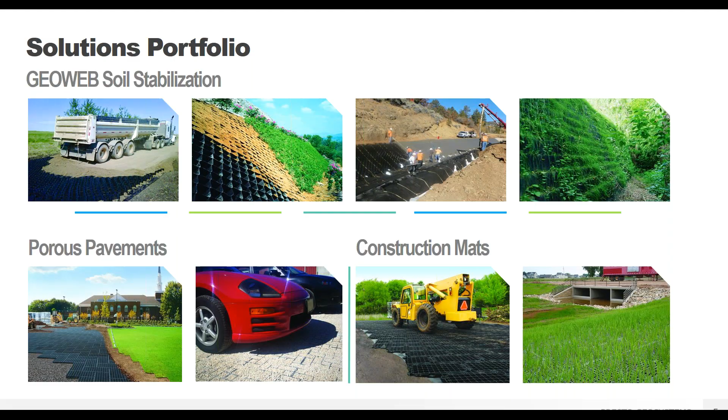So let's begin with discussing how Geoweb 3D confinement can provide benefits for unpaved and paved surfaces. The Geoweb system consists of 2 main attributes. The first is the cell size. The cells come in 3 different diameters: 8.5, 10.5, and 18 inches. The cell wall heights include 3, 4, 6, 8, and 12 inches. The actual cell size and height will depend on your site-specific project details and site conditions.

Presto will provide a free evaluation, including calculations, cross-sections, and specifications for free, and this is no matter how big the project is.

The ultrasonically welded seam, where all the connecting points are located, is very important to the function of a geocell. The stronger the seam strength, the better performance of the geocell, period. And a strong seam allows for better lifetime performance.

Geoweb is produced using high-quality, virgin, high-density polyethylene resin for consistently strong welds at the seams, while also maintaining semi-rigid ductile properties, high stress crack resistance, overall toughness, and long-term durability. Geoweb geocells do not use fillers or exotic polymer alloy blends, which can ultimately reduce weld strength. There are often some competing products in the name of increasing cell wall stiffness.

To avoid weld failures and the damaging effects of differential settlement, uniformity and performance across all elements of a geocell system is much more important than stiffness alone.

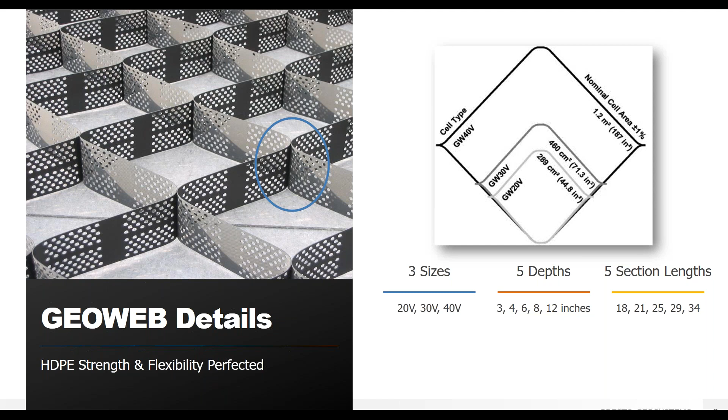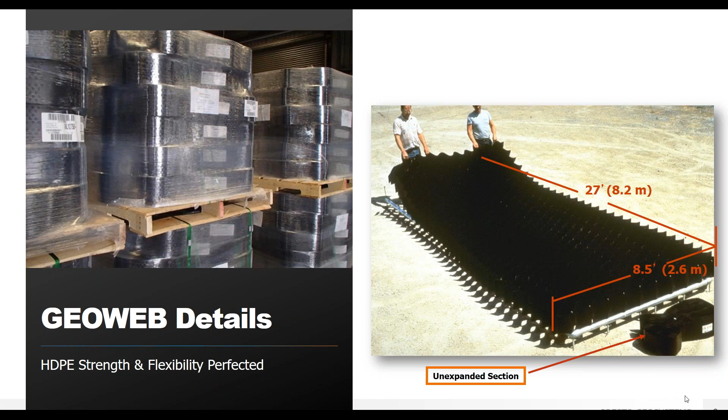Here you can see a typical Geoweb panel. It comes tri-folded on a pallet. Each panel here you can see is about 27 feet in length, and we do have different lengths depending on what size you need for your project. Panels are very flexible, you can see they expand very easily for installation.

In order for a geocell system to perform uniformly, it is critical that both the factory welded junctions, those are the internal junctions, and field joint junctions that connect the individual panels, the mechanical junctions, perform at a level that is the same with that of cell walls. Therefore, an incremental improvement in one characteristic, for example cell wall stiffness, is only valuable if a complementary improvement has been made in the other components of the system.

Like I said, Geoweb manufactures a proprietary blend of high-quality virgin HDPE. Our proprietary formula has stood the test of time for more than 40 years and contains no fillers, unstable polymer combinations, or exotic polymer alloys. For most typical sites, Geoweb retains durability for greater than 50 years, with lab tests indicating 140 years without degradation, even at full exposure to the elements. We stand behind our numbers so you can deliver certainty in the solution you build with materials you can trust.

The system components are all the supporting pieces that help the Geoweb protect the surface and sub-base layers. It also ensures relatively uniform performance of the interconnected system, thereby protecting against the damaging effects of non-uniform deformation and differential settlement in response to applied loads.

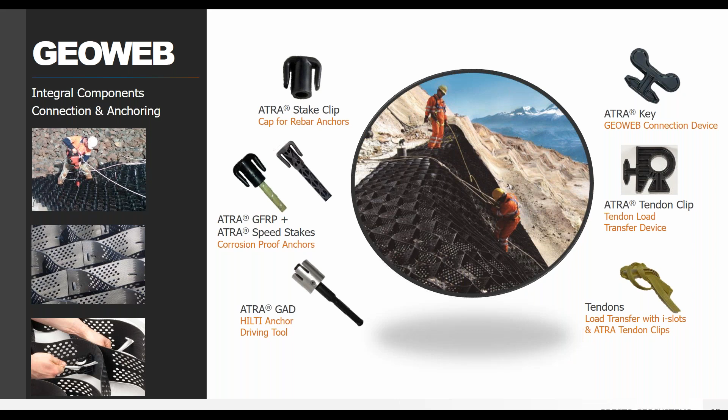First, the Geoweb is equipped with numerous design and construction components that increase the strength and speed of installation. For load support applications, the ATRA Key is a major component for a completely integrated system. ATRA Keys connect Geoweb panels into a single system. The keys speed installation are made out of plastic and will last the lifetime of the project.

ATRA Keys ensure that the panels will not separate, and that the Geoweb system will not fail under anticipated loads. The specific engineering values of the ATRA Key will ensure the system holds up to loading over time without the corrosion seen in staples or the failure underperforming zip tie systems.

Here you can see the slide how the ATRA Key goes through an i-slot in the cell wall, connecting the adjacent panels.

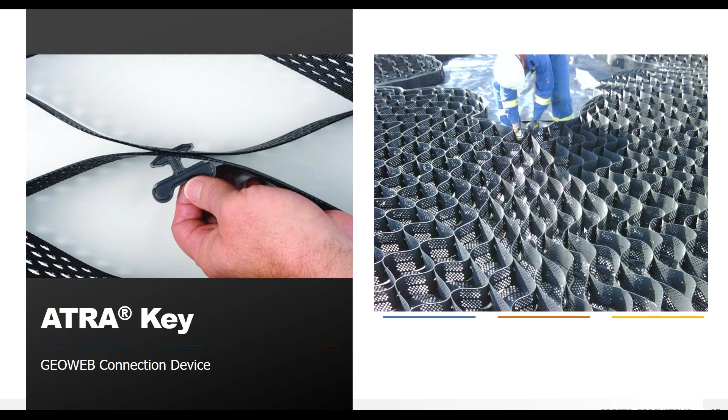The purpose of cellular confinement is very simple. It's to stabilize the movement of unstable soils, both horizontally and vertically. It is an engineered system integrating multiple geosynthetics with the best method of confinement and subgrade stress reduction.

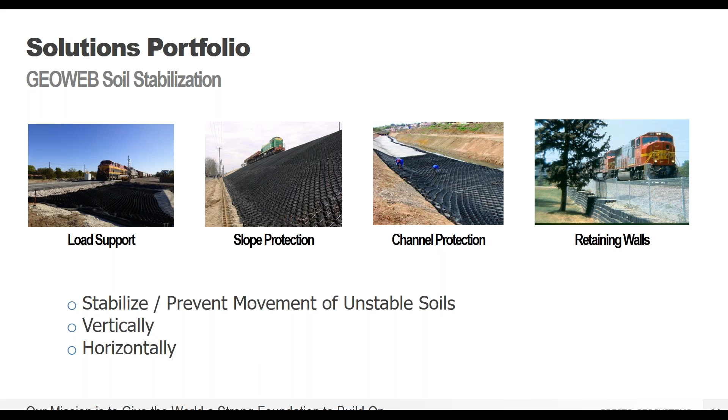Do we need more reinforcement? Do we need to go with an enhanced woven that has strength pounds per foot? Do we have a lot of fines where the fines could get into the non-woven geotextile and clog it? So all those factors come into play when we're designing a system.

Based on the design that we'll give for free, sometimes you may need a subbase under the Geoweb, especially if you've got poor CBRs.

Then the Geoweb system is placed with the desired infill material. Like I said, that could vary. We can use sand, coarse sand, crushed aggregate, recycled materials. It will have a surface course, and that supports the given load.

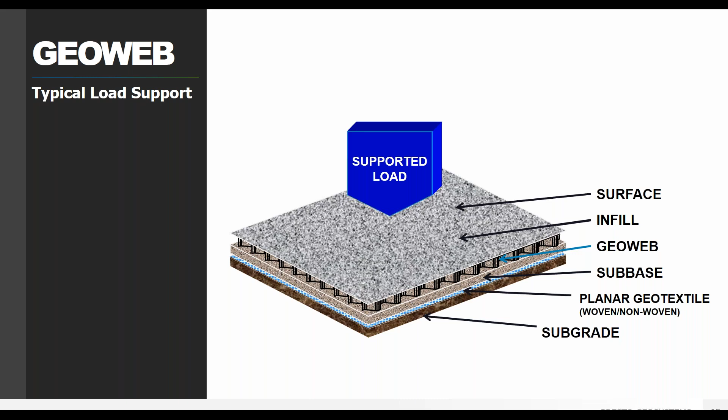So GEOWEB 3D confinement works this way. When a vertical load is applied, the active earth pressure in the loaded cell pushes back against the passive earth pressure in the adjacent cell to form a stable system. So each cell helps support the ones around it.

The GEOWEB cell walls also transfer hoop stress, which is important in keeping the system intact and creates what is known as the mattress effect. The strength of the seams around each cell, the material stiffness of the individual strips, and the connection method between panels are all important factors in determining how the GEOWEB system can improve site condition. Strong seams, semi-ductile resin properties, and integrated connections are critical to the performance of the system.

In a load support scenario, as we know, vertical deformation can only occur with compaction or through lateral movement. By spreading out the load in the classic approach, one can reduce compaction on your surface cells, but only with cellular confinement can you ensure that no lateral shifting and rutting occurs.

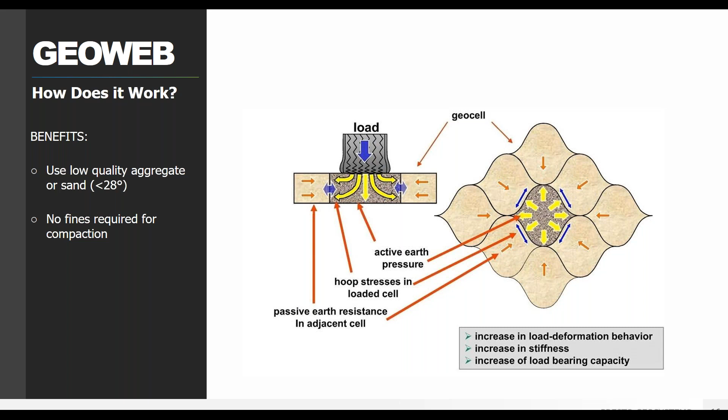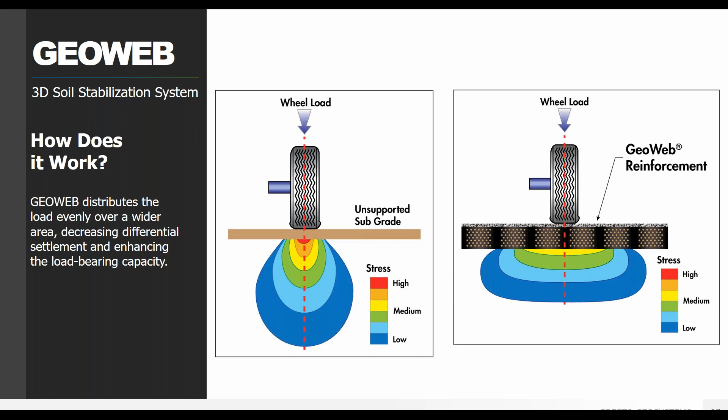Here you can see the stresses on the subgrade with the unsupported subgrade on the left and the GEOWEB reinforcement on the right. Notice how there's a complete elimination of the highest stresses at the surface with the GEOWEB reinforcement. The stresses are reduced and distributed over a wider area, which once again we call the mattress effect. This effect reduces stress reaching the subgrade and leads to a significant decrease in deflection and rutting.

The second main attribute of the GEOWEB system is the infill. The important benefit of the GEOWEB system is that even a low quality aggregate, recycled materials such as crushed concrete, and even sand can be used to infill the cells. Using recycled materials, low quality aggregates or sand you can imagine can save a significant amount of money, not only on the material, but also in the hauling costs.

We can also eliminate fines when desired, since the cell walls provide the confinement and aid compaction and cohesion of the soils. So without fines, you can significantly improve drainage and let the water flow freely through the system, preventing pore pressure buildup and ultimately global failure.

The ability to use sands and low-quality aggregates really sets GEOWEB apart from other geosynthetics, which need a high-quality aggregate. Those products require high-quality crushed aggregates, high friction angles to achieve performance. With the GEOWEB system, low friction angle materials are just fine. The GEOWEB panels achieve their full potential even with these poor materials, which can be a huge savings.

Another good thing about the geocell is once you have this infilled, you can actually start using it as a haul road. It doesn't have to be compacted. Once it's filled, you can start using it as a haul road.

So we now describe how geocell works at the surface to create a stabilized, unpaved road. The aggregate surface has advantage in saving pavement costs. And with geocell filled open-graded course, you can provide some stormwater infiltration and storage. I'll also show you a project for reducing stormwater volumes.

This project was rushed because the railroad purchased a 100-ton reach stacker without understanding if the subgrade would support the intended loadings, and the facility was scheduled to start operation within a few days. The loader made only a few initial passes before the weak subgrade started to fail. Deep rutting caused concern, not only for the integrity of the surface, but also for safety.

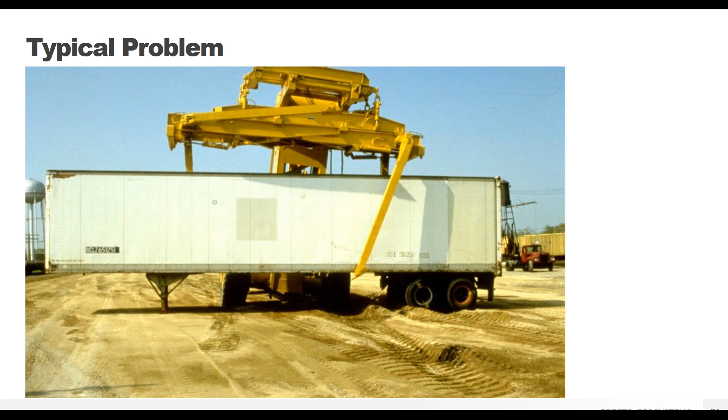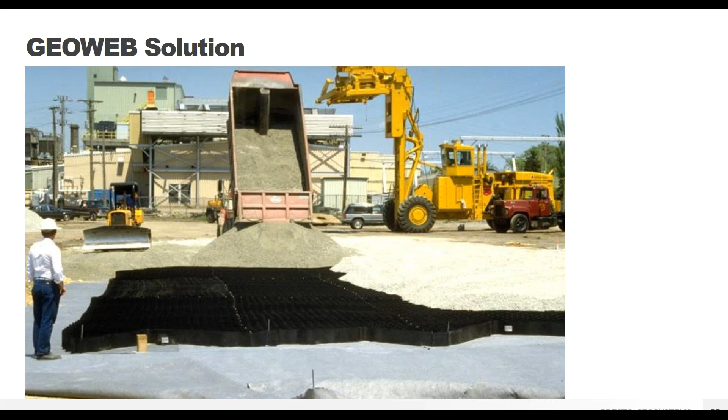We worked with the client. This was actually really close to our shop, done probably about 20 miles from our plant in Wisconsin. Here we use 8-inch geocell panels on top of a 12-ounce non-woven geotextile. This was put in 25 years ago, and it's still in operation today.

This is the intermodal project for CSX Railroad in South Carolina. As you can see in the picture, the 60-ton reach stacker was severely rutting the existing aggregate yard. The rutting led to slowing down of loading and unloading containers, along with routine maintenance required to keep the yard in operation.

The subgrade wasn't that bad. It was around a 2% CBR, but there were so many fines in it that that's what was leading to the rutting. Here you can see a close-up of the rutting that was occurring.

We worked closely with the engineer and CSX to come up with a system to support the load and eliminate rutting. We worked closely with the geotech and the owner on this site, and through the review of the report, it was determined that we could use the on-site fill for the geocell panels, which significantly reduced the cost of importing fill.

Here the solution consisted of, once again, 6-inch geocell panels, enhanced woven geotextile, and a 4-inch wear surface.

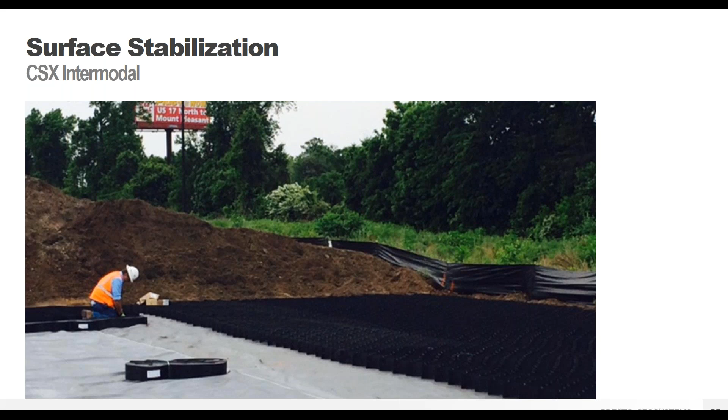Here you can see the geocell panels being filled with the on-site soils. The contractor basically just stripped off the material down to the desired elevation of the subgrade. You can see on the side, they stockpiled it and then transferred material back into the geocell panels as the infill, so once again, limited need to import costly fill.

But one of the biggest savings is that the downtime of the yard was significantly reduced, which was especially important due to the high volume of tractor trailers that the facility handles on a daily basis.

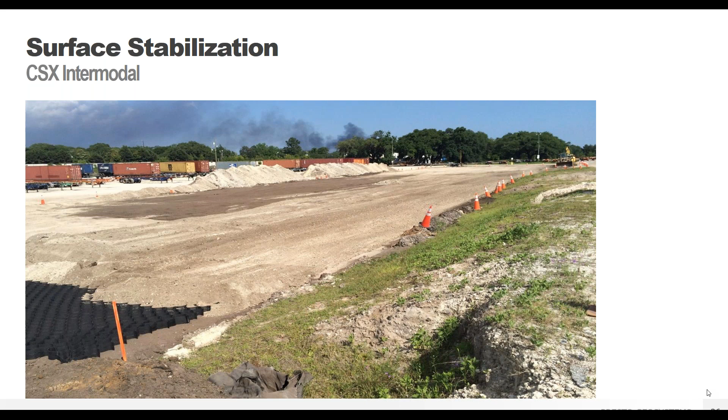And here you can see the final solution. We filled this one up with sand, the existing site soils, and then we came in with 3 to 4 inches of crushed aggregate, just as the wearing surface.

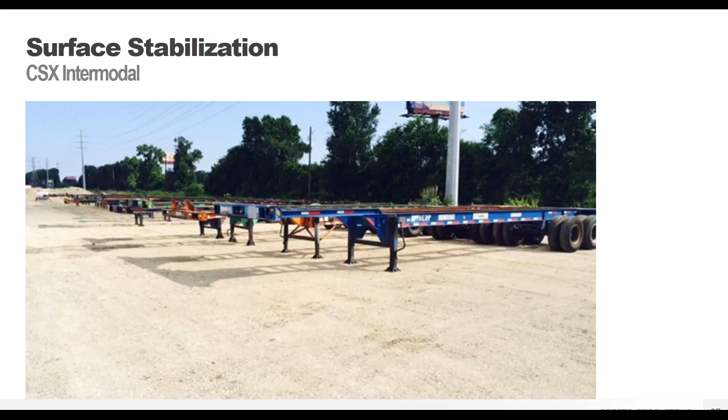This project was started out in Mexico. The original design called for a reinforced concrete surface, but all the bids came in well over budget. So the client looked at different solutions and some value engineered opportunities. Once again, this wasn't that bad, it was a 3% CBR.

Once we worked closely with the engineer, we came up with a system to support the 80-ton reach stackers. This one, once again, the design consisted of an enhanced woven geotextile, 6-inch Geoweb panels, and a 4-inch wear surface. They used a really low quality crushed aggregate sandy fill that they had around the site.

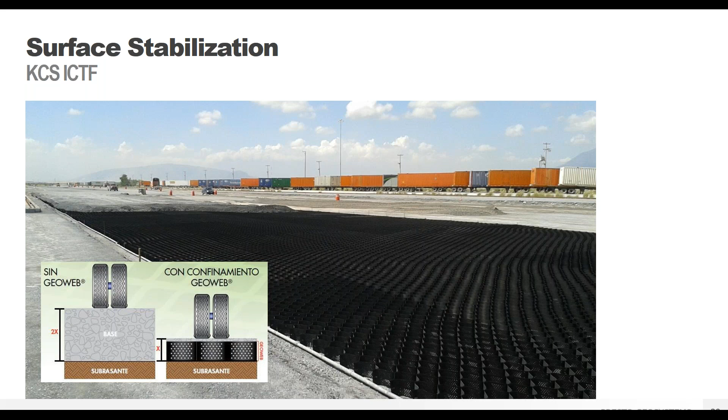Here you can see the panels being infilled with the infill material. The fines content was limited to about 15% to allow stormwater storage and infiltration.

This photo is also good at illustrating how infilling can be accomplished. The trucks just dump the aggregate into large piles. Then either with a front end loader, a dozer, or any similar equipment, the aggregate can be pushed into the empty cells while the equipment drives on the filled areas. So it's a very fast and efficient process. It doesn't take any additional training or expertise on behalf of contractors.

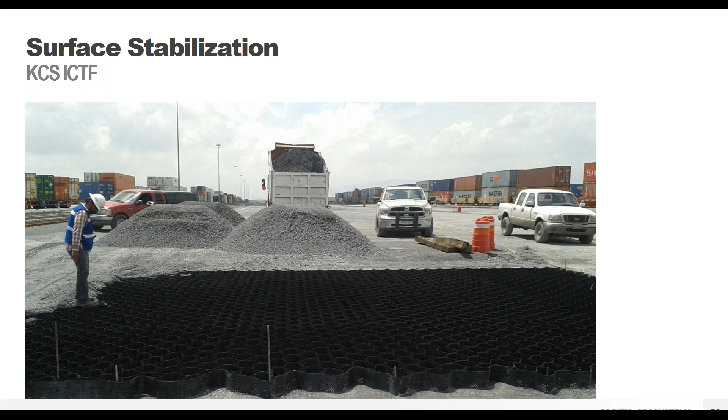You can see the final wear surface being applied over a solid surface. After placement on this one, they actually had a small asphalt tack coat as a surface just to control dust and provide a little extra strength.

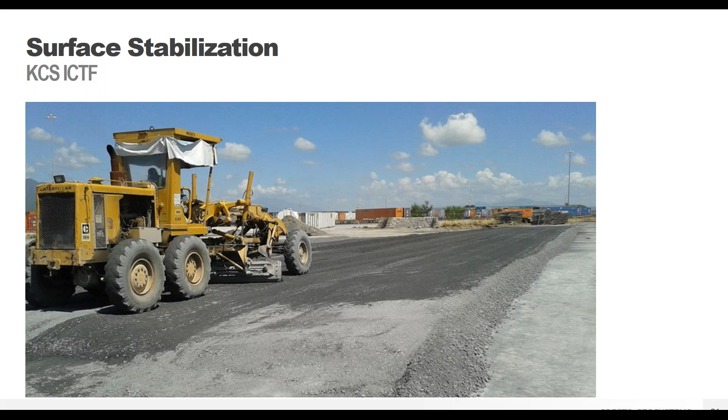This was an interesting project as the Geoweb solved two issues. This was a 2-acre site in Pennsylvania where the owner wanted to increase the size of the facility, but there was not enough room to provide a paved surface due to lack of area to increase the stormwater ponds.

The first issue was to provide a durable driving surface over a poor subgrade for parking and storage areas along with the area of expansion. The existing surface on this one would require maintenance on a routine basis due to the poor subgrade and heavy loadings. The area had to support AASHTO H20 loadings, along with the heavy loadings from the wheel gantry cranes.

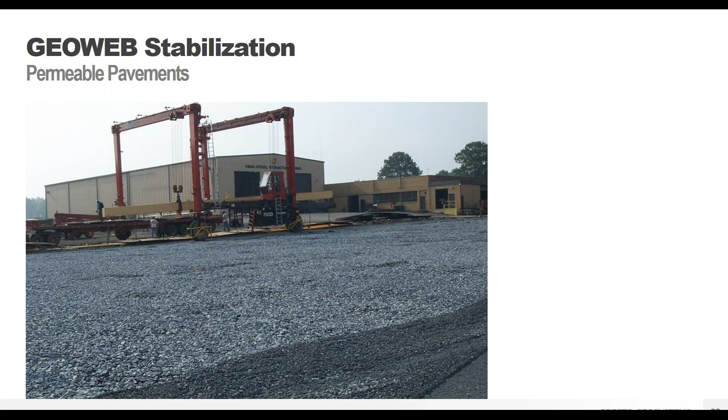So through the design process, we came up with a solution for him. We actually had a geotextile go down, a heavyweight non-woven geotextile. This one we had a 4-inch base, 6-inch Geoweb, and then a 3-inch wear surface applied.

The second issue was to provide on-site stormwater storage to allow the facility to reduce the volume of water reaching the stormwater pond. As I mentioned, since you don't need fines to achieve compaction with the Geoweb, the system will act as an on-site detention basin, storing water in the void spaces of the fill.

As a general rule of thumb, a 3/4 crushed aggregate has a void space of approximately 35%. So you can imagine how much water you can store potentially to reduce stormwater runoff and ultimately reduce the stormwater pond volume. Since the local stormwater municipality let us store water inside the Geoweb system, it allowed for the expansion of this facility, and the existing stormwater pond did not have to be increased.

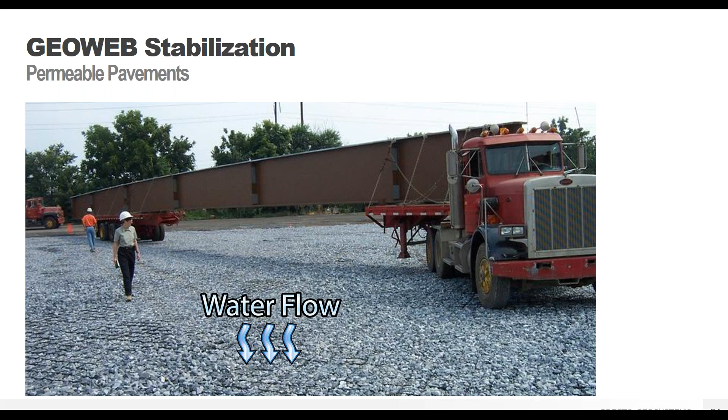You can see a close picture of the open grade material that was used. No fines, good for lockup.

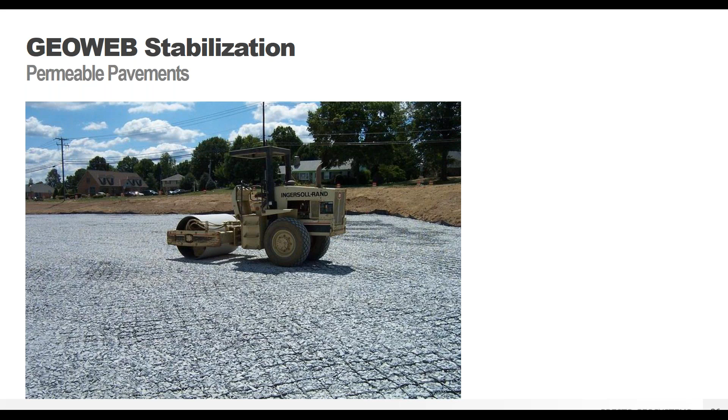One point on GEOWEB compaction: there's no need to really hammer the infill with vibration to achieve compaction. Typically, vibration is kept low, and the weight of the compactor is more than adequate to provide proper compaction. If you try to really vibrate the material, you can actually lift the GEOWEB panel. So just be aware that you should just lightly vibrate or typically just roll it.

We do port and intermodal works all over the world. This is a GEOWEB surface stabilization system for phase 3 at the port of Invergordon in the UK. The project was for 6 acres.

It consisted of 2 separate areas. One area was 3.5 acres and used 4-inch deep GEOWEB panels, and the second area was 2.5 acres and used 6-inch deep GEOWEB panels. The 2 areas were subject to different loading conditions, and during the design phase, we worked with a consultant to determine the most appropriate panel depth to meet site conditions and still provide a cost-effective solution. The 4-inch deep GEOWEB panels were used in the vehicle parking and storage areas, and the 6-inch was used where the gantry cranes were.

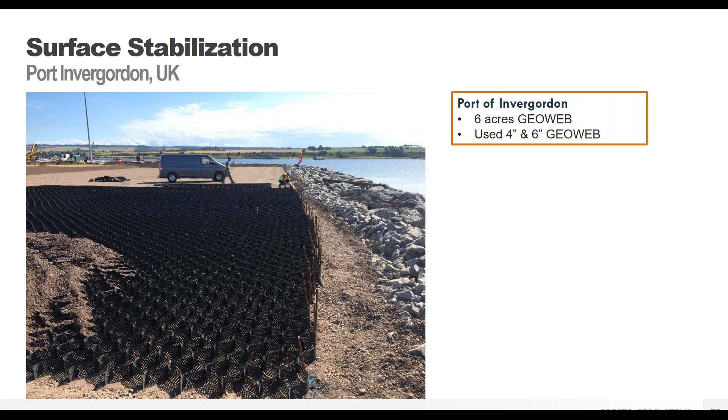The area was constructed using unbound pavement with a crushed gravel surface. The GEOWEB presented the perfect solution to minimize the overall cross-section depth through its load transfer mechanism while controlling differential settlement in the heavy loaded gantry crane area.

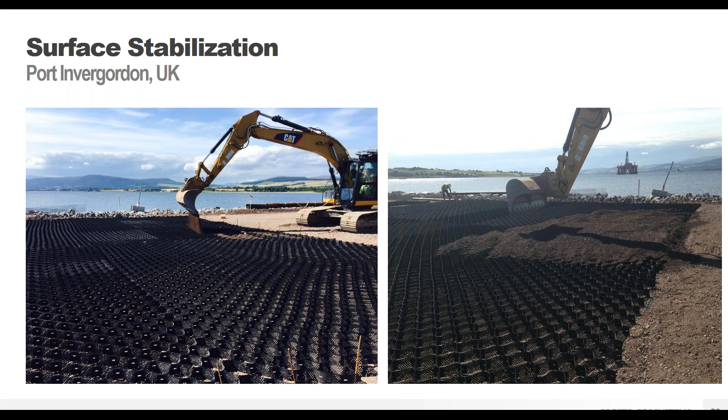Differential settlement was a significant concern on this project due to the variable subgrade strengths. So the engineer developed a cross-section that would bridge low subgrade CBR areas, using an enhanced 70 kilonewton per meter woven geotextile along with the GEOWEB. One of the most cost-effective methods to reduce long-term consolidation from settlement due to cyclical loadings on a soft subgrade is to increase the stiffness of the overlying area.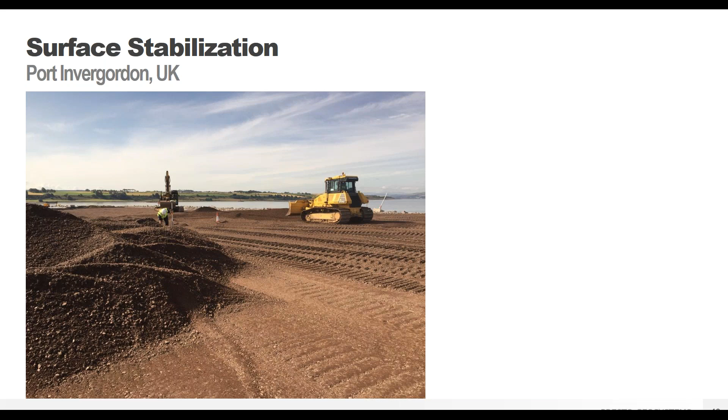Under cyclical loadings for all these projects, Geoweb prevents the lateral movement of the infill material and dramatically increases the shear resistance. In effect, Geoweb is more like a three-dimensional structure or semi-rigid slab. The high shear strength and greater load distribution reduces the vertical stresses reaching the subgrade, resulting in a more durable subgrade that increases pavement life, preventing long-term settlement and consolidation.

Here they're just lightly compacting it, no vibration. Here you can see the final surface after compaction. This project was about almost 6 acres and a 2% CBR.

It doesn't matter how small the project is in size, we always provide the same amount of technical support in our evaluations, including cross sections, calculations, specifications, and a written summary.

Here's a project for gantry craneways being used to unload trailers from rail cars. You can see there's a significant amount of rutting due to the crane, and the interesting methods used to stop it. They tried metal panels and even timber mats with no luck.

We do a lot of work with this Class 1 railroad. The Class 1 that operates this track told the owner to give us a call since it was taking so long to offload the rail cars.

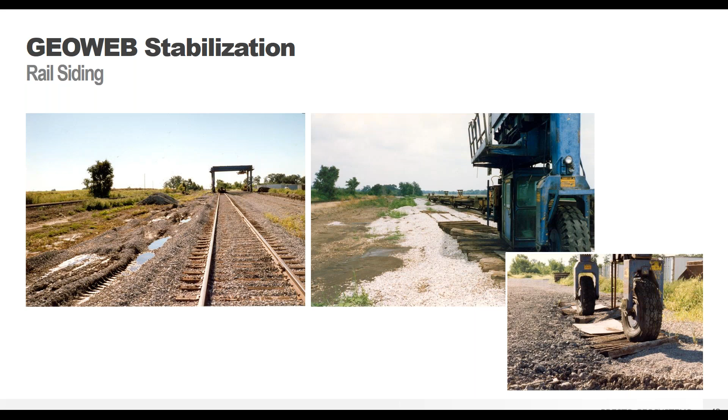Like I mentioned, it was not a large project. They only used 15 panels of Geoweb on each side of the track, but we still provided a full evaluation, so the owner and engineer completely understood our solution and its benefits. The solution consisted of a heavyweight non-woven geotextile, 8-inch Geoweb, and a 4-inch wear surface.

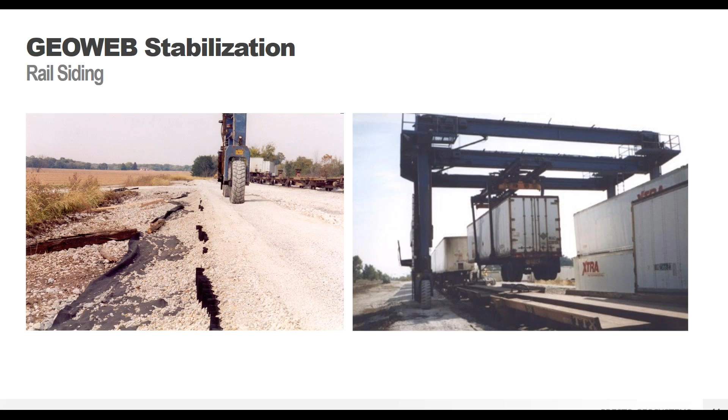As mentioned, we provide free evaluation of all projects, no matter the size. The evaluation will include the written summary, cross sections, calculations, and specifications. Typical turnaround time is 1 to 2 days, and we'll provide full details of the calcs used to prepare the evaluation, so you have a complete understanding of how we did the calculations for all of our projects.

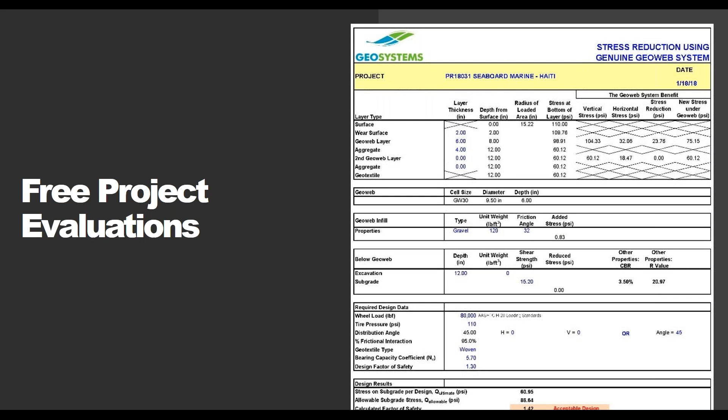Typical turnaround, 1 to 2 days. If we have questions, we'll give you a call and work those out.

So now we discussed how Geoweb is beneficial in our hard pavements, including asphalt, reinforced concrete, and roller compacted concrete, and especially in areas with soft subgrades and drainage issues.

We can all relate to this slide and recognize the problem. An unstable base under hard pavements over time will lead to rutting, settlement, potholes, degradation, and eventually complete failure. Common factors include differential, localized settlement, soft subgrades, and poor drainage. Reducing the damaging effects of differential settlement and protecting against buildup of excess pore pressures are key factors in extending pavement life and reducing long-term maintenance costs.

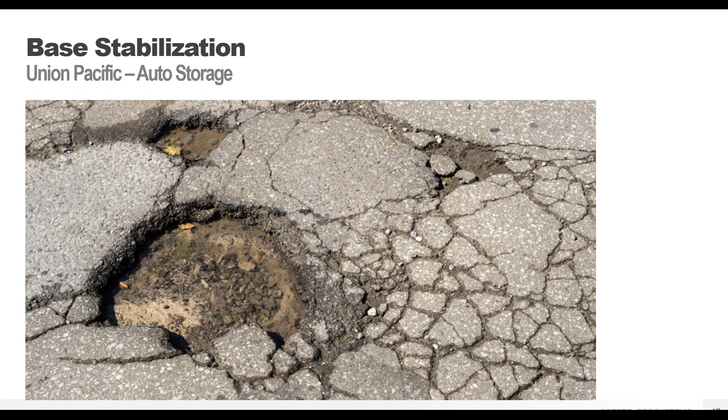This project was for Union Pacific Railroad in Benicia. It is an auto storage yard for cars being offloaded from Korea. The original design included geogrids with a high-quality aggregate. When construction started, the subgrade was too wet and too soft for geogrids to be a cost-effective solution, so the engineer contacted us to provide a value engineered solution using Geoweb.

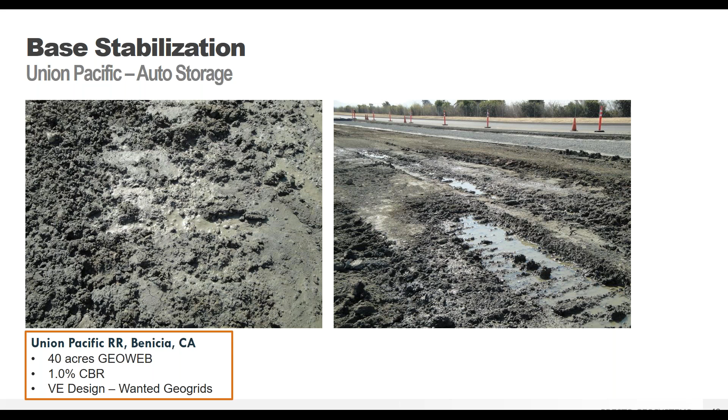For GEO, this area has some very low subgrade strength. CBR is 1% or less. You can see the pictures how mucky it is. So we worked closely with the engineer and the railroad to provide a Geoweb solution.

It consisted of a high strength woven geotextile, 6-inch base layer, 6-inch Geoweb panels, and then a 2-inch wear surface over the top. Ultimately it was paved with asphalt.

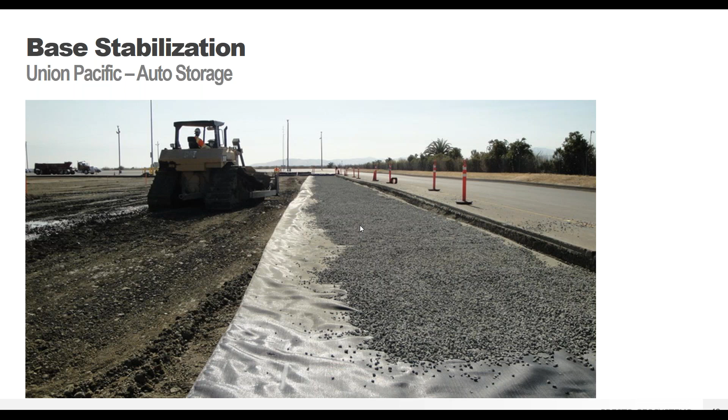They put this base layer underneath the Geoweb to function for 2 different purposes. One was some extra stability and extra strength, but also we kept this layer low fines and allowed the water to flow freely under the pavement so it didn't build up the pore pressure.

You can see the expanded Geoweb panels and open grade infill being placed into the panels. Here they just dumped them and used dozers and front end loaders with the GPS system to get the proper elevation. Just a closer view of the infill procedure.

Once again, aggregate is just dumped and pushed into the cells, most commonly now just with the GPS system on top of the dozer. Once the cells are filled, you can immediately drive on it without compaction. Very quick to install. You can see the Geoweb panels are always far out ahead of the infilling.

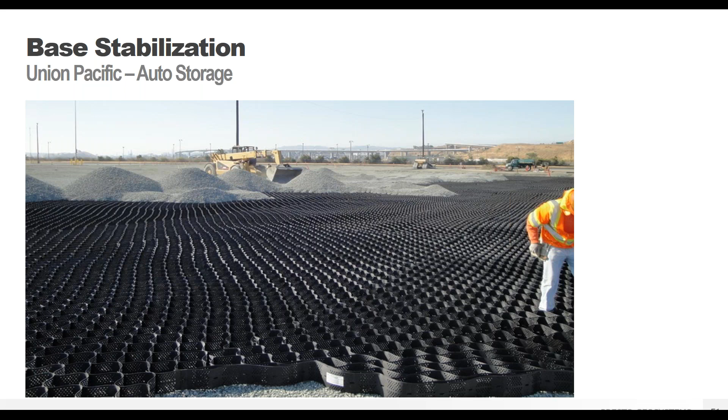You can see the placement of the asphalt on top of the GEOWEB panels and the wear surface. A regular asphalt paver was used, and it's compacted with a smooth barrel roller. No special equipment or procedures are required when paving over the GEOWEB panels, so the paving crew can install it at regular speed without needing extra training or additional equipment of any kind.

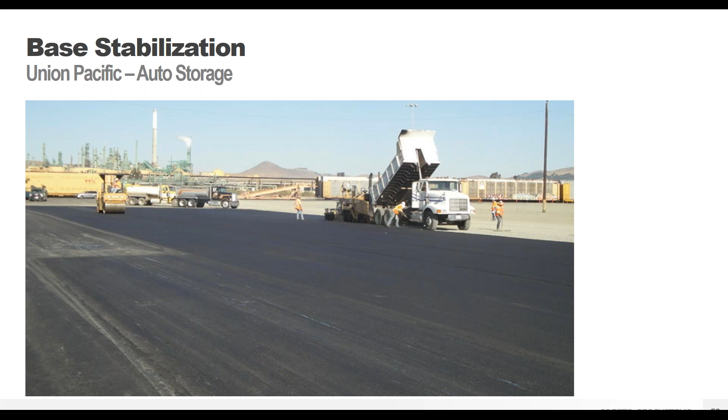This is another auto storage yard, this was for BNSF. Oh, before I forget, this one, the Union Pacific, we're actually just finishing up our third phase of this project. We're doing another 7 acres this year, so it's a pretty big site.

This is another auto storage yard for BNSF, by the Seattle International Airport. This was a 25-acre site, subgrade strength ranging from 1 to 3% CBR. The original design included 2 layers of geogrids. After bidding, the cost came in higher than the budget allowed, so the engineer contacted us and we did a value engineering solution.

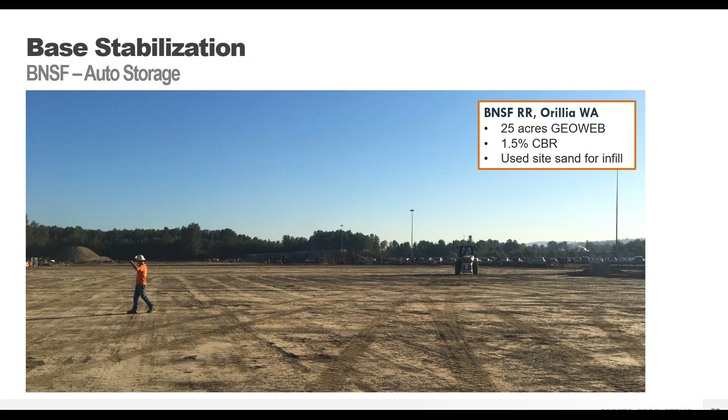The cost came in extremely high because the aggregates were very expensive. They had to be hauled basically right through downtown Seattle, so it wasn't a very good use for high quality aggregate. It was determined when we met with the engineer that we could actually use on-site soils mixed with the gravel, so we saved a significant amount of material costs, but also sped up construction time.

Staging is very important for any project. We have a significant amount of installation experience, and we will be on site to support the contractor with tips for quick and efficient installation methods.

Here you can see the use of staging tables, where adjacent panels are just connected together with the ATRA keys prior to being expanded and placed across the prepared subgrade. Each of our standard panels has an area of about 230 square feet. This contractor is using the staging tables to connect 3 panels, providing an area of almost 700 square feet, so you can allow the workers to stand up while connecting the panels. It goes a lot faster, a lot more efficient.

Then the panels are just transferred over and connected to the panels that are already in place. Typical installation rates, when they start, they'll be a little slower, sort of like hanging drywall. You want to install the first couple panels so they're straight. But once you get going, at least 3,000 square feet an hour with a crew of 3 people.

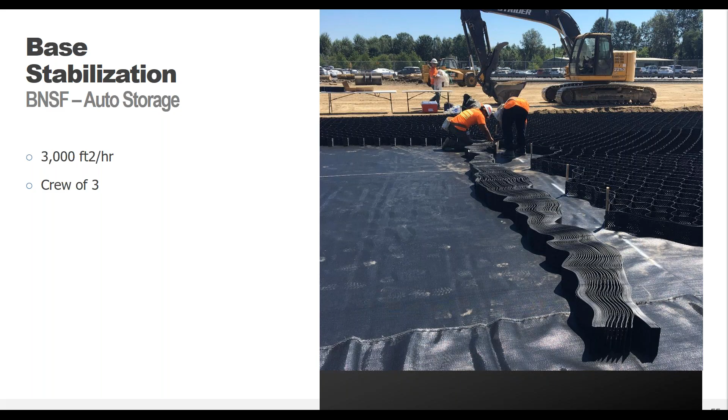This contractor wanted really square panels for the entire installation, so they actually survey staked each corner of every panel over the 25-acre site. Once the GEOWEB panels were filled, they just went ahead and pulled the stakes.

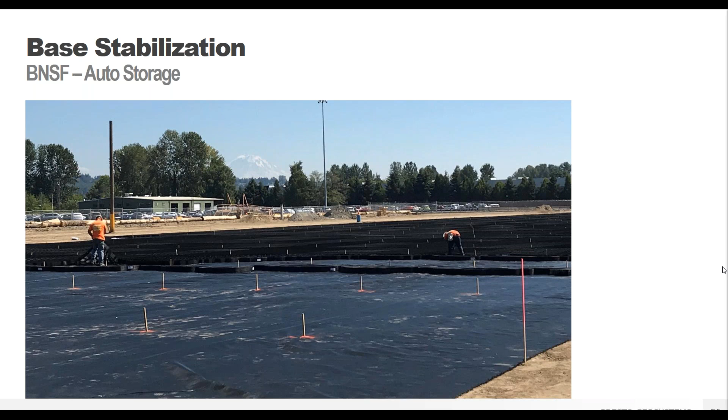You can see each of those. This would be lengthwise, 27 feet in length, 8.5 feet in width. Here you can see a picture of the site with the installation ongoing, a 4-inch wear surface to allow for access. You can see the stockpile soils over here.

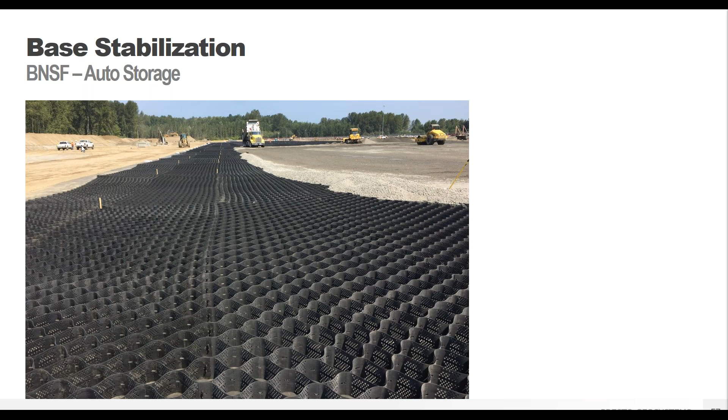The dump truck is once again backed up to the GEOWEB panel, dumping in fill. Here you can see spreading with the bulldozer. He has a bulldozer with a GPS system right here, and it goes very fast. And here's the finished surface.

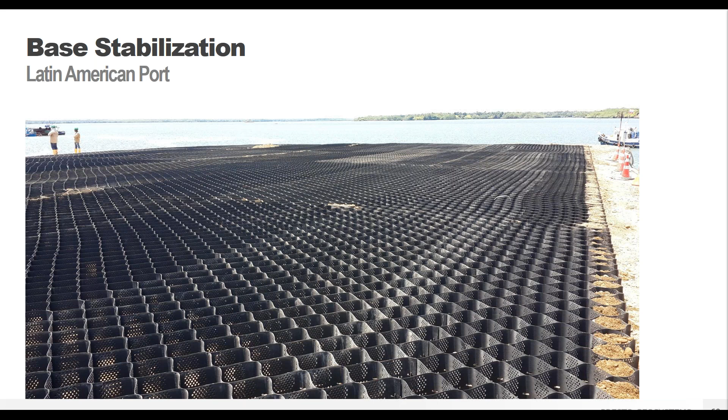This is a project for a port in Latin America, which served as coal and container storage. It consisted of an access road and the storage area. The subgrade had a very low CBR, and the owner contacted us for help to provide a base solution for an access road and storage. We worked closely with the engineer once again to provide a complete solution. We used an enhanced woven geotextile, 6-inch GEOWEB panels, filled with a local fill, sandy aggregate fill.

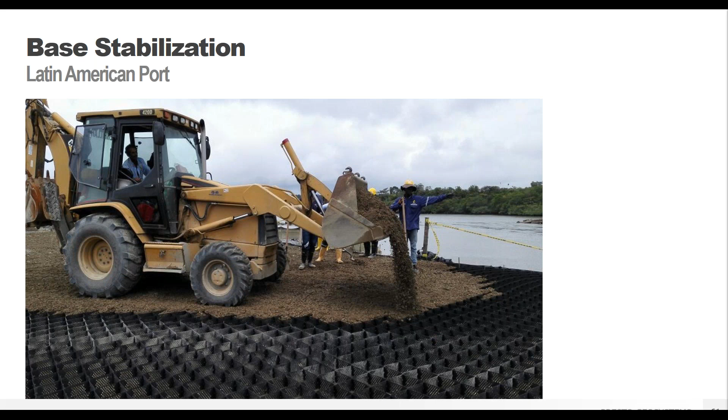Like I said, you can see when they're filling them, they're just driving right across the uncompacted cells. After placement, it's ready for compaction. Once again, you don't have to vibrate it very hard, just overfill it and compact it.

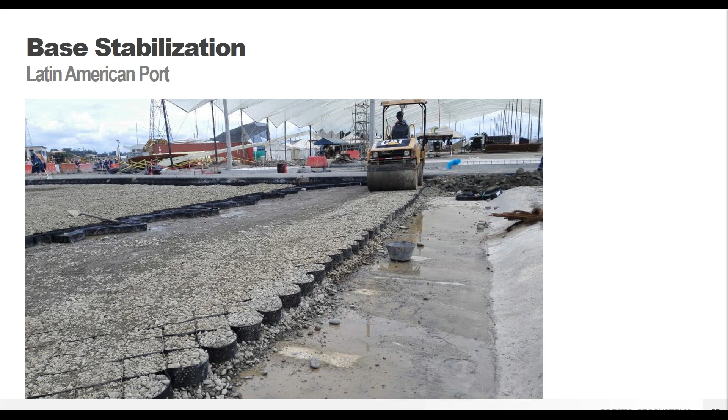Here's the final surface before the asphalt layer is placed. You can see this installation tape, packed it to the top of the geo panel. They had no overfill, which is acceptable, even if they do asphalt. If it's going to be just an aggregate surface, we recommend a couple inches over the top of the compacted material. Here's the final access road to the port, showing the asphalt.

This is a very interesting project we did. This was the Port of Panama. During excavation, the contractor actually encountered a very large area of petroleum contaminated soils. You can see here.

They basically stopped the job. The options were limited, as you can imagine. The removal and offsite treatment and disposal costs would have been significant.

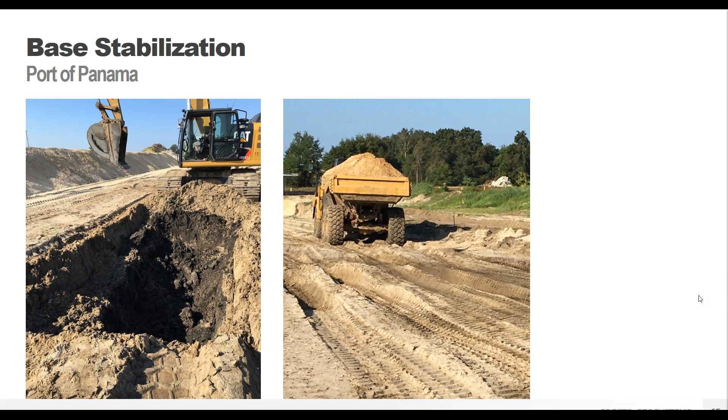This was an old Air Force base, so it was a government-owned site. We worked with the government, the engineer, and the owner to actually use this contaminated sand as infill for the geo panels. You can see all the existing sand—this is Florida, we have a lot of these sands—these are always used for geo infill. So they just leveled the site, then used the contaminated material and the clean material for infill for the geo.

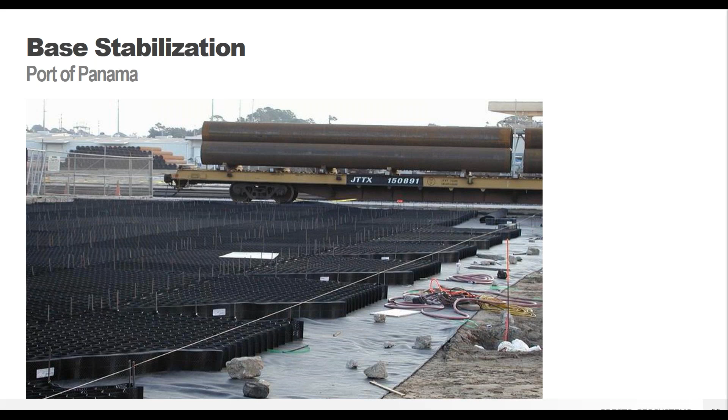You can see the laydown yard, enhanced woven geotextile, 6-inch geo panels. This one actually ended up with 6 inches of asphalt.

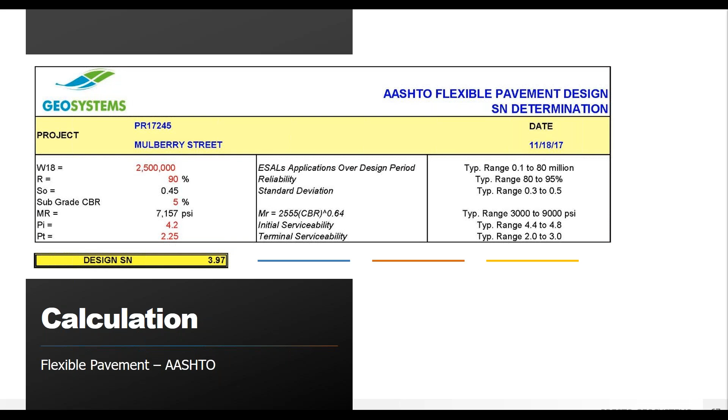Once again, we'll provide free evaluations for projects with geo under asphalt. We use the AASHTO method along with load equivalent factors and also based on geo research, and we can give you all those calculations.

This project was a design build for Florida East Coast Railroad. In the overhead photo, you can see the gantry craneways that were used to offload the rail cars. The gantry crane was constructed with roller compacted concrete.

The original ground improvement strategy called for 8 months of surcharge loading over most of the site to accelerate primary consolidation and protect against excessive settlement in the future. Not surprisingly, the long timeline to implement the preloading strategy was deemed unacceptable to the project owner. Since it was a design build, Presto was asked to be part of the team that came up with cost savings for base stabilization and long-term settlement concerns.

We worked closely with the engineer. The first opportunity was to use sand infill to replace a specified 3/4-inch crushed limestone that would have had to be imported to the site. The specified geogrid would have required a high-quality aggregate since the performance of the geogrid is directly related to the quality and friction angle of the aggregate. The ability to use sand infill saved a significant amount of money at construction time.

The second function was the ability of the geosystem to control short and long-term differential settlement to extend pavement life. The geosystem behaves like a semi-rigid slab to improve load distribution and reduce vertical stresses reaching the subgrade, allowing for small amounts of uniform settlement. Since geo significantly reduces vertical stress reaching the subgrade, the end result is a more durable system with increased pavement life through controlling settlement.

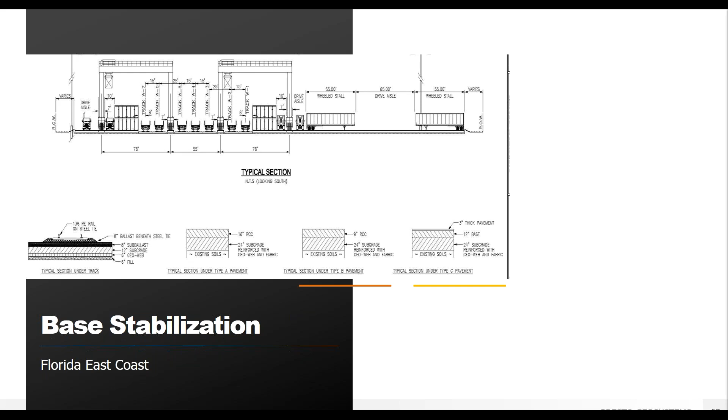This project has been in for about 5 years now, and it has settled, but it's settled uniformly, and probably less than half of what the original settlement calculation showed.

Here you can see once again the design consists of high-strength woven geotextile, 6-inch geo panels, locally available sand fill, and an 8-inch cover. You see all the panels being installed on top of that enhanced woven geotextile.

The combination of enhanced woven geotextile and the geo provides the system to control settlement, bridge areas of soft soil strength, and reduce consolidation settlement by significantly reducing the stress in the subgrade.

I should mention that when I'm talking about enhanced woven geotextiles, they're in the new AASHTO manual and in the GMA manual. It's not a woven slit tape, it's a geotextile. Woven geotextile allows drainage, filtration, and reinforcement. Slit tapes have very low flow capabilities, and pore pressure can build up and actually lead to global failure of the cross section. These slit tapes have actually been removed from the GMA manual for use in any load support applications. So I'm talking about enhanced woven geotextiles—they provide drainage, filtration, and reinforcement.

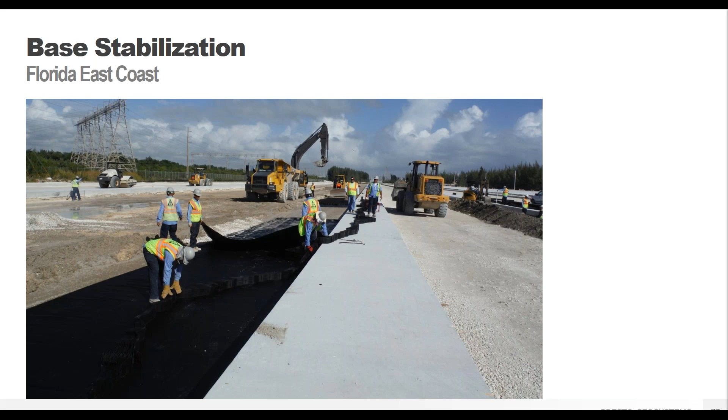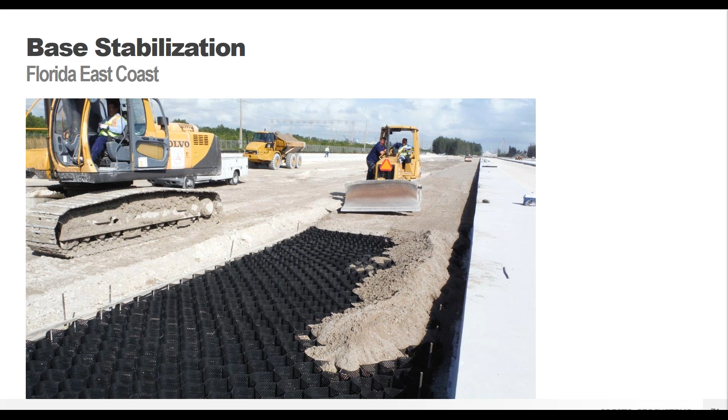Here you can see the sand infill being placed in the cells, in addition to sand being compacted with a roller in the distance, allowing staggered work rather than having to finish each stage—a great way to reduce construction time.

Installation of roller compacted concrete. RCC pavement is pretty interesting—the wear surface is basically a low slump, high PSI concrete with no reinforcement. It typically goes down in lifts approaching 12 inches, becoming more popular around the world.

Another important cost savings for the owner on this job: the original design consisted of 24 inches of RCC pavement, typically going down in 10 to 12-inch lifts. By reducing the stress on the subgrade, we were able to reduce the RCC thickness from 24 inches down to 16 inches, saving construction time and costs.

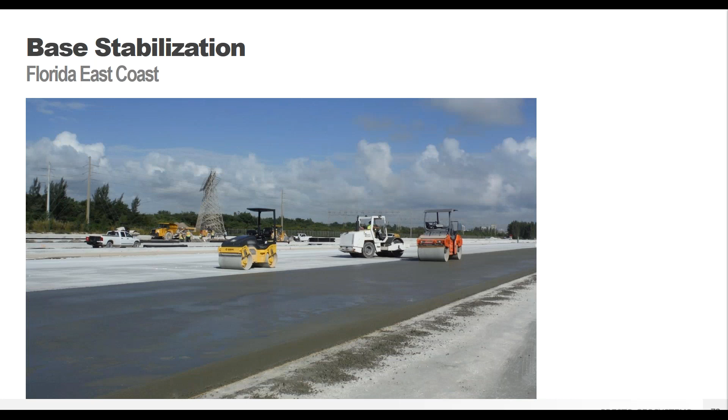No maintenance on this facility over 5 years. This is a project we did in Dakar last year, reporting a 7-acre area that needed upgrades to enable operation of the gantry cranes.

The terminal needed base layer and surface stabilization with strong considerations for cost and timing. This was a design build project, and the Geoweb load support system offered value engineering considerations and benefits such as fast installation, reduced cost cross section, with no need to surcharge the area.

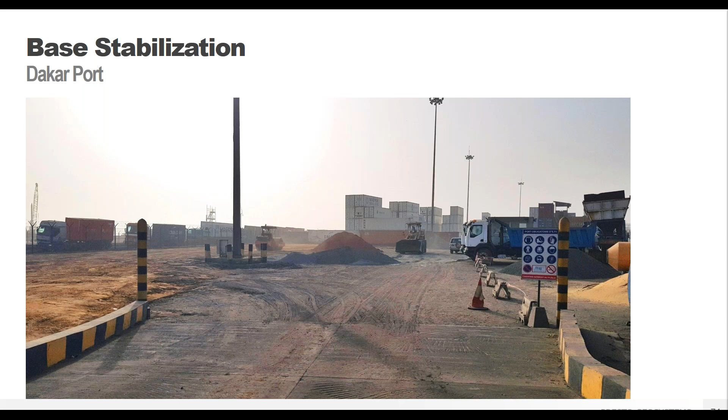The original plan was to provide site surcharging for 3 months. Geoweb also allowed use of recycled on-site infill material, eliminating the need for chemical stabilization they were originally going to do. So it saves some time and costs. This was, like I said, a design build.

With the COVID travel restrictions, on-site support was limited to basically our distributor in that area. But we have very detailed online webcasts, videos, and installation guides. We met with the teams and the project owners via Teams. We have a very useful website I'll show you at the end of the presentation. We have a YouTube channel with hundreds of videos showing proper installation techniques. Of course, we typically have a rep on site with installation and training support.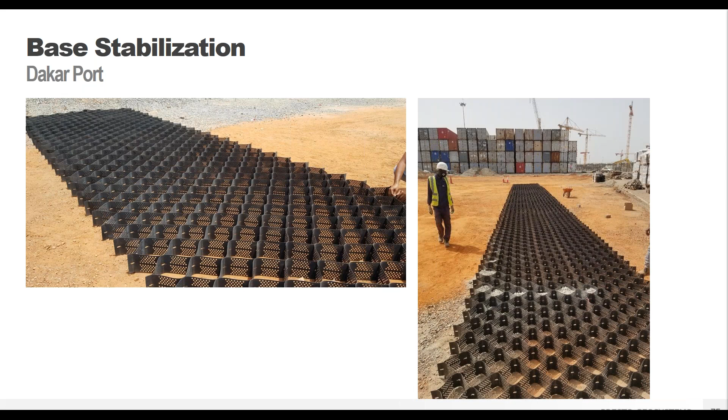Here you can see the contractor used a really low quality aggregate fill, mostly sand. You can see in the picture here, very low quality fill.

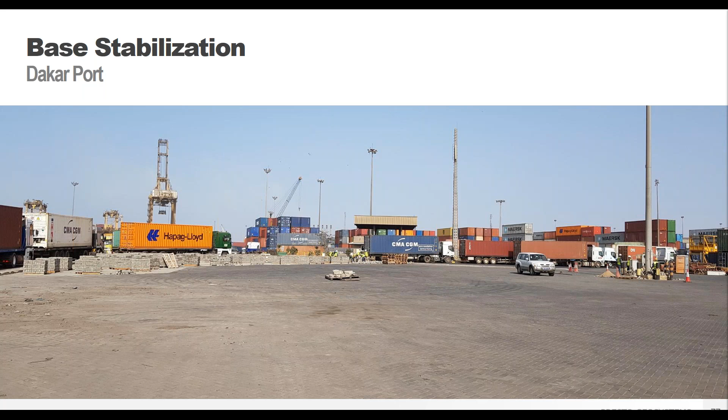The final solution consisted of concrete pavers. 120 millimeter concrete pavers were installed over the GEOWEB system. This was the first 2.5 acres of the yard, just installed before the rainy season. It had some heavy use installation with no settlement or maintenance needed, even with the exceptional heavy rain and flooding that occurred. For this type of design for the concrete pavers, we used the British Ports method for our designs.

Once again, same thing with the hard surface pavement, whether it's concrete, roller compacted concrete, or pavers, we provide a full design evaluation, including cross sections and calc specs for the concrete pavers. We use the AASHTO method for asphalt and reinforced concrete. For roller compacted concrete, we use the guide for compacted concrete from the National Concrete Pavement Center, and the British Ports method for the pavers.

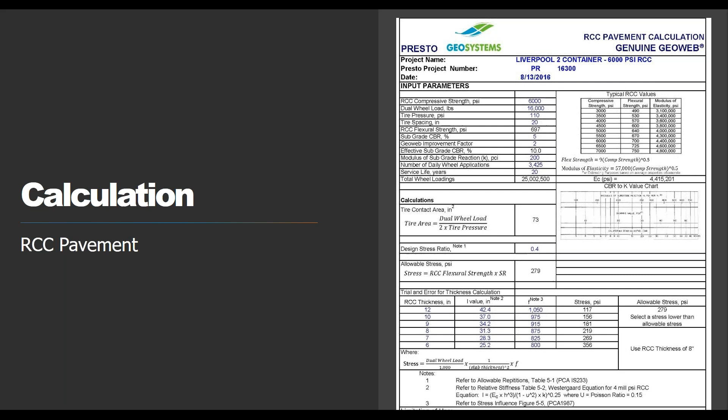In summary, GEOWEB can be added to port intermodal projects to provide a more stable and longer lasting service for unpaved areas, which reduces maintenance repairs, or paved surfaces, including asphalt, reinforced concrete, and roller compacted concrete. GEOWEB decreases pressure in the subgrade to reduce differential and long-term settlement, which will extend pavement life and reduce maintenance.

The ability to use low-quality aggregates, recycled materials, or even sand can save a significant amount of money. Also, the ability to reduce the stress in the subgrade can potentially reduce the final pavement thickness, leading to project savings. Once again, we provide free evaluations for a complete solution, which includes not only GEOWEB, but also the geotextile type and strength, depth of the subbase if required, and thickness of the wear surface or pavement layer.

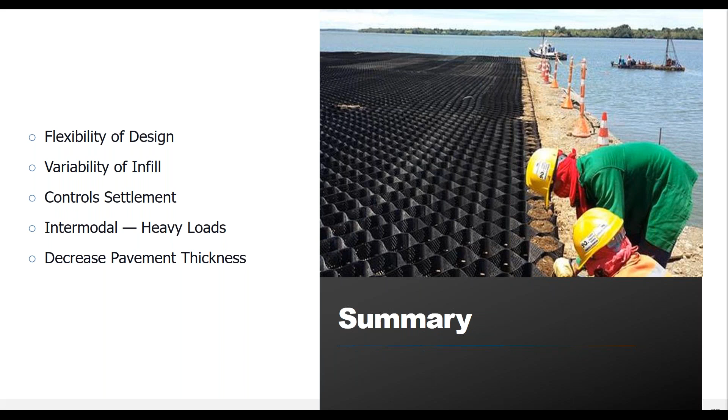I get this question a lot when we do these webinars: why can you use sand? GEOWEB was actually invented by the U.S. Army Corps of Engineers, and Presto developed the technology almost 40 years ago. We developed it for sand infills, and it actually was called Sandgrid for the first 10 years of its existence.

In a couple of minutes, I want to go over some slope protection, which we do a lot of on intermodal and port facilities. GEOWEB for slope protection is a very flexible solution. We can use different types of infill depending on the project needs. We can use topsoil for a vegetated surface. A lot of embankments we do with aggregate infill to reduce the need for cutting and maintenance. We also use concrete in projects where no maintenance is desired, or areas subjected to heavy rains and high shear stresses.

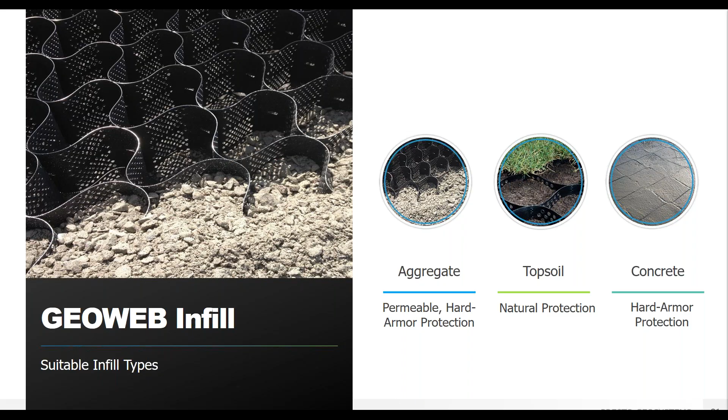On this slope project in Montana, adjacent to a rail facility, aggregate infill was chosen for nearly 200,000 square feet on 2 sides of the embankment for erosion control, but also because they wanted a low maintenance slope cover.

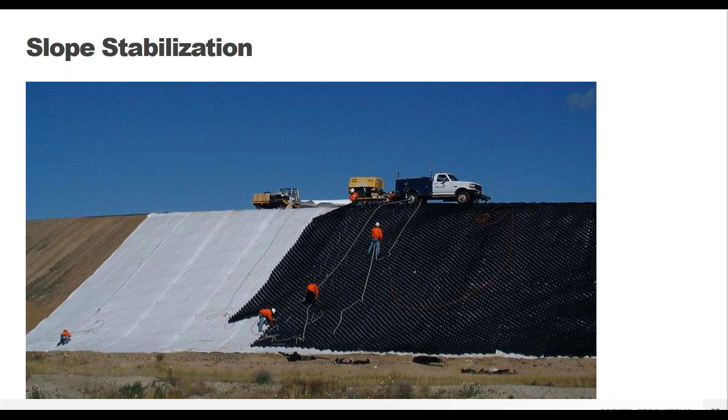Here you can see the material is basically installed from the top of the slope down. Here you can see the workers installing stake anchors to keep the GEOWEB sections in place. Here you can see the panels being infilled with crushed aggregate. Infill is always done from the top down to prevent panel overstretching.

Here you can see these are 24-inch ATRA stakes, basically a number 4 rebar, 24 inches in length, with a little ATRA stake clip on top. Especially on larger projects, you can see this guy using a Hilti hammer, a percussion hammer, just to drive in the anchors so you don't have to pound them in by hand. We have a lot of other quick and efficient installation techniques in our manuals and all of our guides.

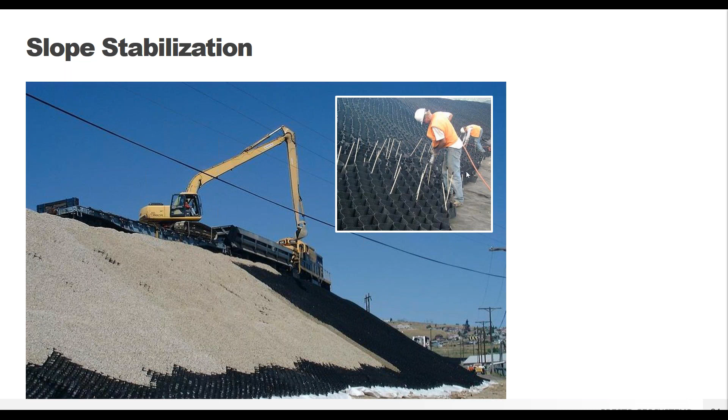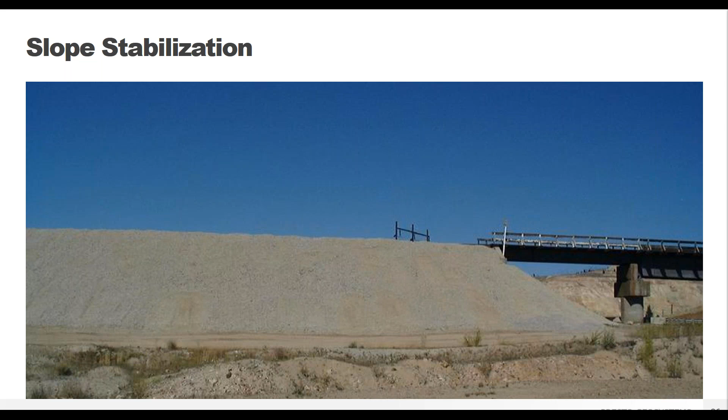This was a project, a new siding for Union Pacific in El Paso, Texas, of 450,000 square feet of 4-inch Geoweb filled with crushed aggregate. This area does not get a lot of rain, but when it does, it typically gets a short and large burst. So UP has been using Geoweb on these type of sidings to eliminate the need for any maintenance.

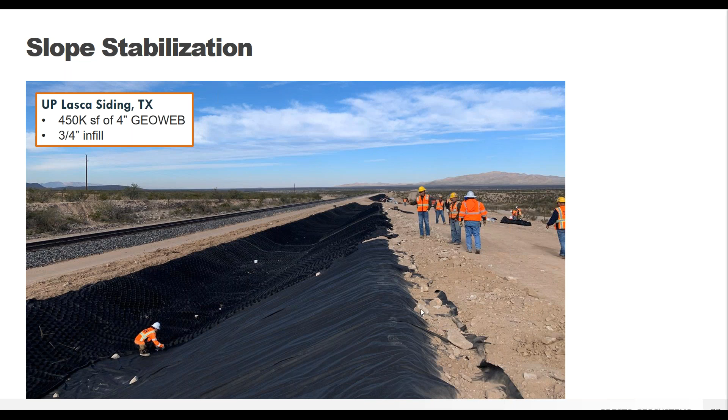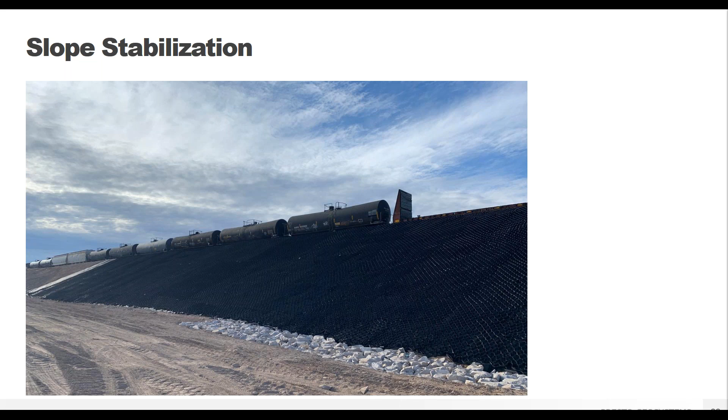You can see on this one, put down a woven, non-woven geotextile. We have a little anchor trench on top. You can see the panels prior to infill placement. Large riprap was spread on the bottom next to the culverts for extra protection.

Here you can see the large culvert pipe on the rail. So you can imagine how much rain this area gets in the burst of that big of a culvert pipe. A very big area.

Here's the intermodal project. We did this for Union Pacific down in Laredo, Texas. About almost 750,000 square feet of Geoweb. The original design actually called for concrete, 6-inch reinforced concrete in the channel.

This is the channel on top. And then they had basically ACB revetment mats going down the side of this thing. Due to the high bid costs, the contractor came to us about some value engineered solutions. So we came up with a solution using 3-inch deep Geoweb panels on the slope, and 4-inch Geoweb in the channels, and the crest replaced the reinforced concrete and the revetment mats.

So basically we have 4-inch Geoweb here and 3-inch Geoweb on the slopes. The only reason we did 4-inch here was a little bit of extra stiffness because they had trucks that would come here and get out these settled material that were in the channel.

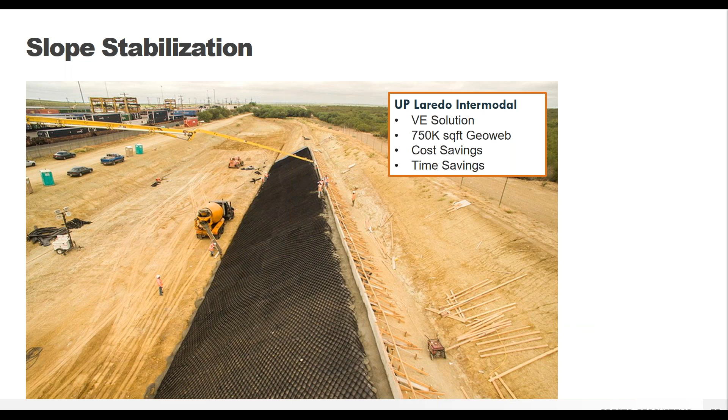You can see the concrete being placed inside the Geoweb panels. You can see how far the Geoweb protection extended around the yard. You can see also how the Geoweb channel on top. So here's the Geoweb channel on top extending all the way out around the yard, and then the 3-inch slope protection. This saved them a significant amount of dollars as far as construction.

So we completely replaced all the formwork and the rebar and just used concrete, regular standard Geoweb infill with concrete. So that provides the reinforcement and the strength and the formwork. So this facility got into service a lot quicker using Geoweb versus traditional methods.